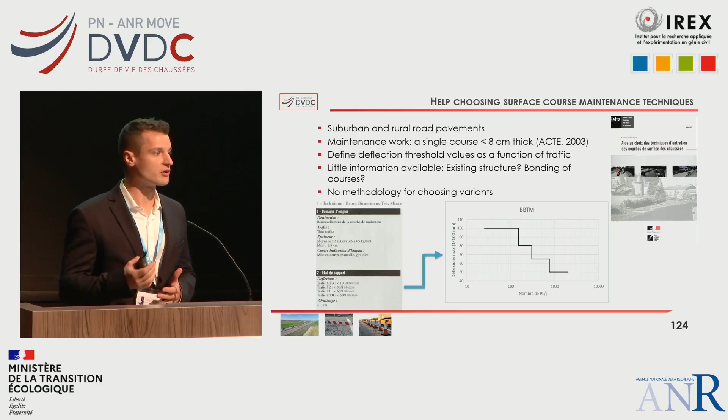It was designed for project owners to enable them to choose the best wearing course so that they could then perform the maintenance work in the countryside and in peri-urban areas. The idea was to provide them with technical documents for each of the different road techniques so that they would then have access to all of the details on the advantages and the disadvantages of the different wearing courses.

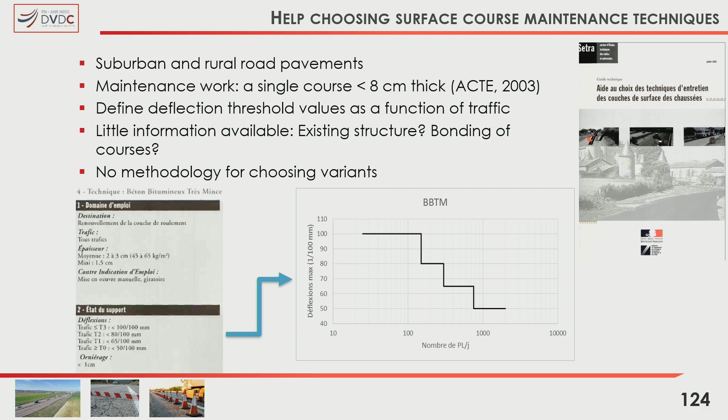So what you can see on the photo is that for the different road surface courses, the guide recommends, depending on the volume of traffic, you need to have a deflection threshold that you do not exceed in order to be able to apply everything that's in the guidebook. So we showed an interest in the deflection values. We wondered where the deflection values come from. So we did a bit of research work, and we came up with deflection values as a function of the traffic in various guides.

So when we dug a bit deeper, we were able to contact the ACTE guide, and they confirmed to us that the choice of defining maximum deflection thresholds was based on an empirical study following on from feedback given by experts who worked on different work sites in France in the network, who simply gave their impression, their opinion on the levels of deflection not to be exceeded.

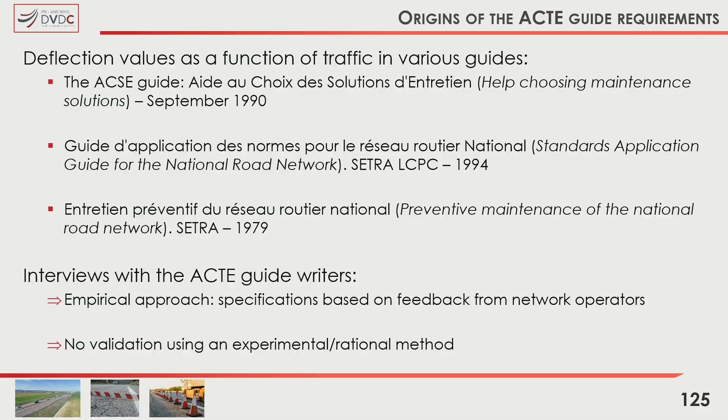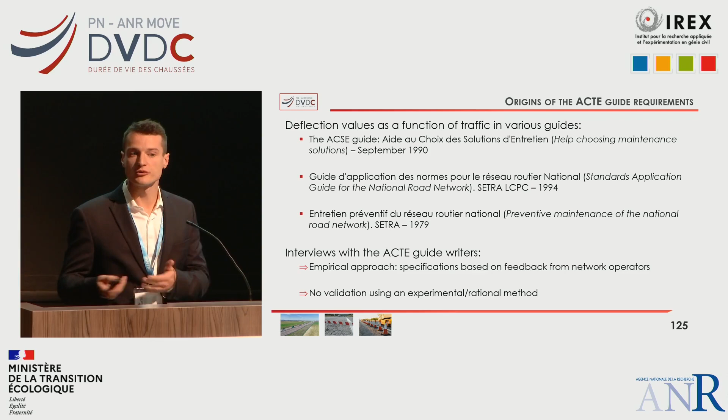So the issue of this kind of empirical approach is that it doesn't give us the opportunity to propose alternative solutions or to come up with innovative solutions in relation to what already exists. And so this is why we decided to take a closer look at how we could come up with a rational approach as to the wearing course that would be chosen, taking into account the deflection behavior.

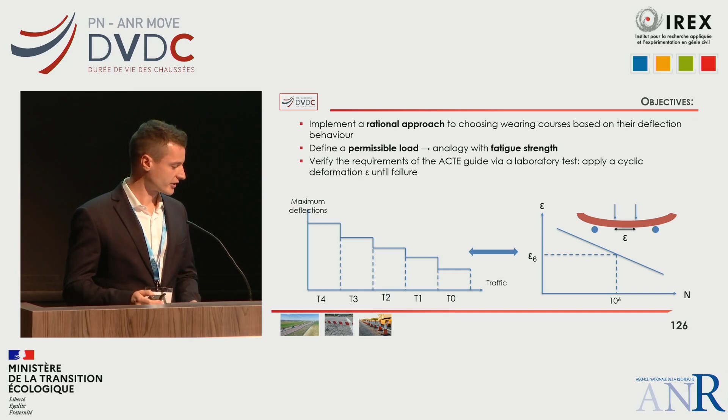So we looked at one thing. Can we work out what the maximum level of fatigue can be, and can we create a degree of consistency between that and the traffic and the potential wear in order to try and work out the optimized level of fatigue and the optimized type of wearing course. So these were basically the objectives that we set within the scope of the action.

The big problem with the ACTE guide is that it provides very little information on the different types of wearing courses. They talk about maintenance work, for example, where you add a new wearing course on top of the original road pavement surface, but we don't really know what type of surface structure is being imposed. We don't know the extent to which damage has occurred.

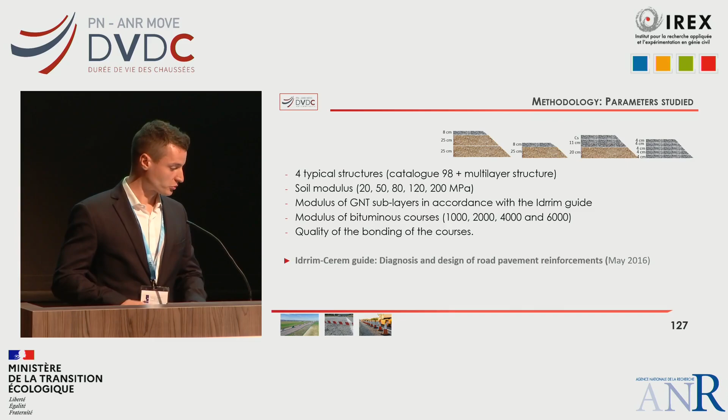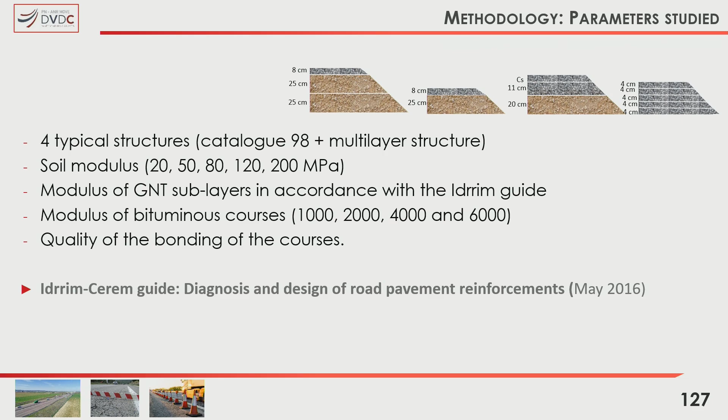So we had to come up with a certain number of hypotheses in order to be able to look at as many different deflection possibilities as possible. And we needed to see what the wear and tear was going to be on all the different base courses potentially. So here you have the whole list of hypotheses that we came up with using the CEREMA guides for reinforcing road pavements, everything that they recommend. Next, when it comes to the modeling process, we relied on the Alizé software. Why did we rely on this?

Well, we know that Alizé, when it comes to road pavement contact, as has been said, it's not necessarily very reliable when it comes to the contact point between the tyre and the road surface. However, everybody uses Alizé. So if we have values that have been calculated by Alizé and that we can then link back to deflection, we thought that it would suit everybody, let's say, or would at least be accepted.

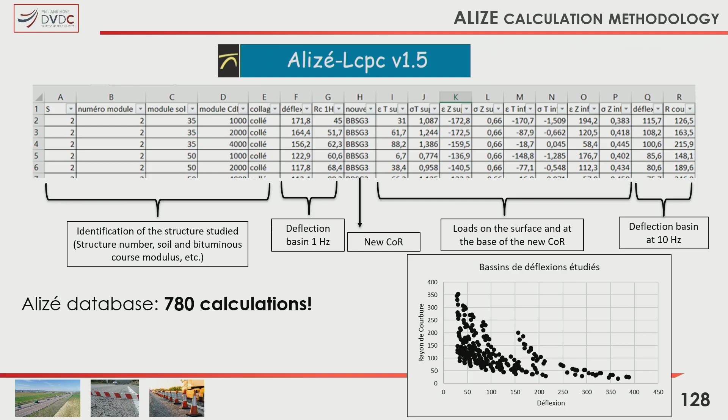So thanks to Alizé and all of the road surface structures, the different base courses, the different surface courses, we were able to perform a massive number of calculations. And for each calculation, we had the values above and below the new wearing course for which we'd calculated the deflection values and also the curve radius. And then we were able to analyze all of this data thanks to an Excel file that enables us to sort through the different parameters that we wanted to observe.

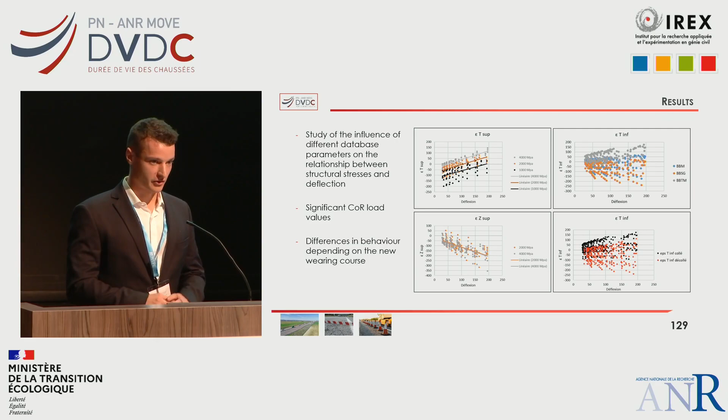So here you've got just some of the results that we obtained. I'm not going to necessarily go into detail on all of the results because there's so much we could say. However, what we can see is you don't get the same behaviors depending on the type of wearing course that we've examined. You can have the impact of certain parameters. On the table here, for example, you have the impact of the former wearing course. It all depends on what's being used as a binder.

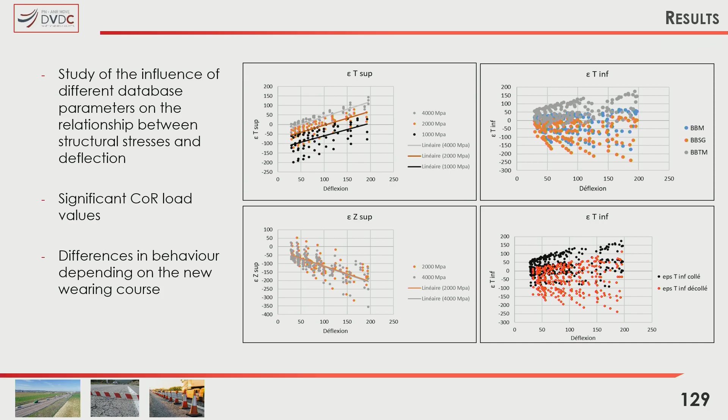What we can also see is that we have certain types of wear that are considerable when we look at epsilon T and what's used for the design. This is very important. We imagine that we ought to pay a lot more attention to the stress, for example, the potential stress when we're choosing the wearing course.

Unfortunately, to give some form of matching between our calculations and the ACTE guide, it's very difficult to match the two because at the end of the day, the wear depends on the stress, which depends on many different factors. We thought that we'd have varying degrees depending on the deflection, whereas in fact, we got rake-like results, as you can see on the screen, so it was very complicated to analyze.

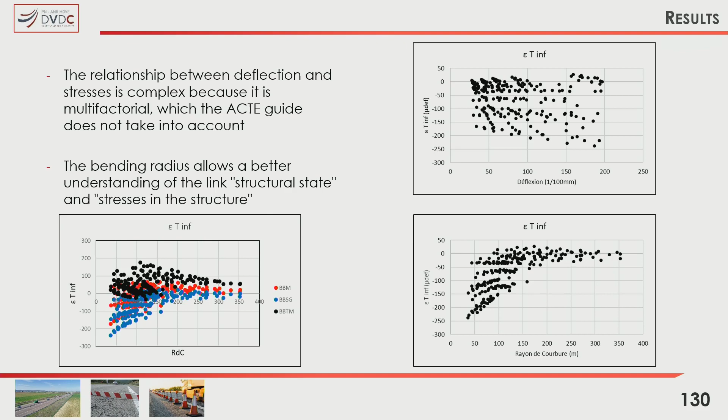We realized also that when we talked about wear in relation to the bends and not in relation to deflection, the results varied, so it made it very difficult to draw conclusions. And the issue is, if we look at stress in relation to the bends, we're never in line with the ACTE guide because they only focus on deflection and they never talk about the curve radius.

So just to conclude on the work that we performed in relation to the ACTE guide, we were able to see that the ACTE guide is based on an empirical approach, and very much so. We attempted to propose a method in order to streamline and rationalize everything so that we could then potentially provide new solutions on what wearing course to use. We used the Alizé solution to look at the different wearing courses in the hope that we could use it for designs of the future.

However, it would seem that at the end of the day, deflection is not necessarily the best parameter for establishing the most appropriate wearing course. We thought it was in fact better to look at the bend radius. In the report that I recommend and is in the books provided by DVDC, we suggest an approach based on 4 points, tests that haven't yet been carried out. We're still talking about them, and we're thinking about the most appropriate method to apply, and it will involve the curve radius. So it's very much open to discussion for the moment.